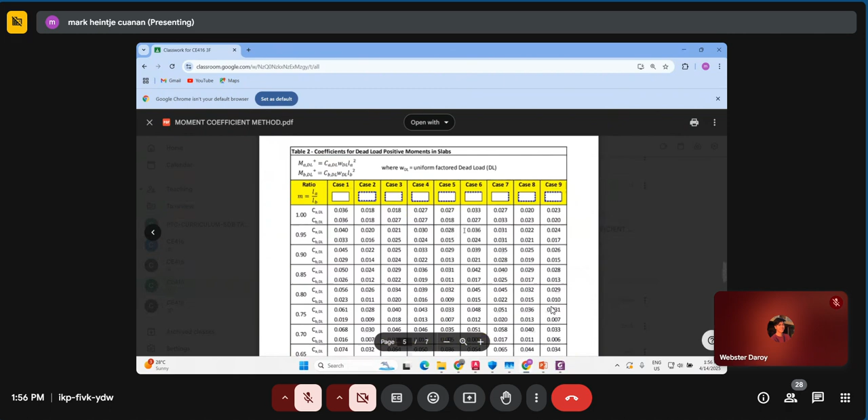Okay? So and then for our references, na dire ang ato ang lecture notes, and this file here is actually the file which explains the coefficient method and with the corresponding table. Itong table for our concrete slab design. Okay, yung mga coefficient, wherein ato na siyang i-discuss later on.

Okay, so as what we have discussed last time, for this week we are going to discuss the design of concrete slab because this will be included sa inyong final lab exam, or this will be included sa inyong compilation. Okay, so take note, you cannot design your frame, or for example, your beams, without designing first your slab.

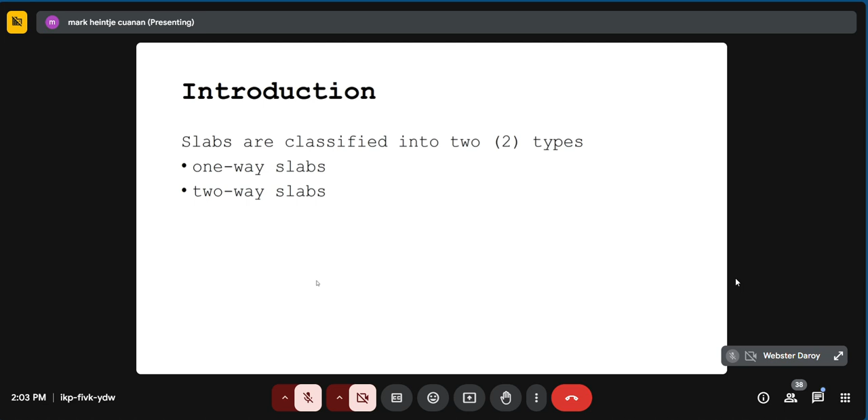Ganina ang definition ni Mr. Castro: pag ang atong longer side divided by the shorter side of the slab is greater than 2, then we can call it as one-way slab. So another approach in determining if the slab is one way or two way is based on the support. Kung ang support niya is only 2, duha lang kabuok, unsupported siya along the other sides of the slab, then we can also consider it as a one way slab.

Aside from that, if your slab is a composite slab, just like a steel deck slab, you can also consider this as a one-way slab. Because here, the load is not actually distributed by the concrete, but it will be distributed to the decking that we are going to install. And take note, the decking here is actually in one direction only. Isa ra ka direction sa atong decking.

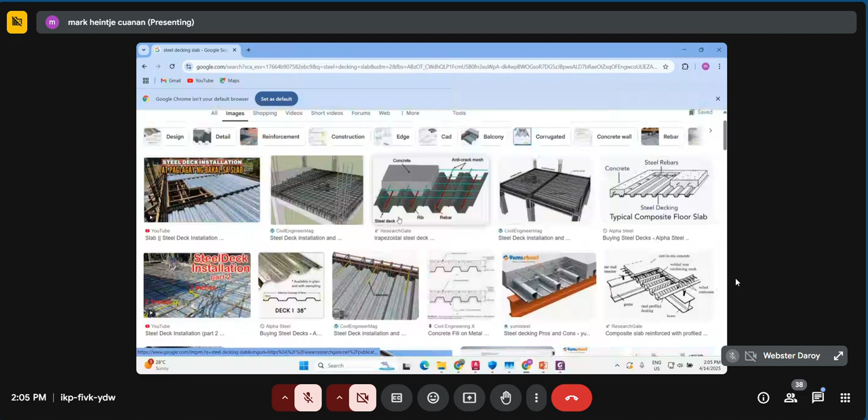So, meaning, kung asa siya nagpatong, or kung asa dapit ang iyang direction, didto i-transfer ang atong load. In other words, when the direction of the deck is only one, then the end-to-end of this span will transfer the load towards our beam. And in that case, that particular action is also a one-way slab.

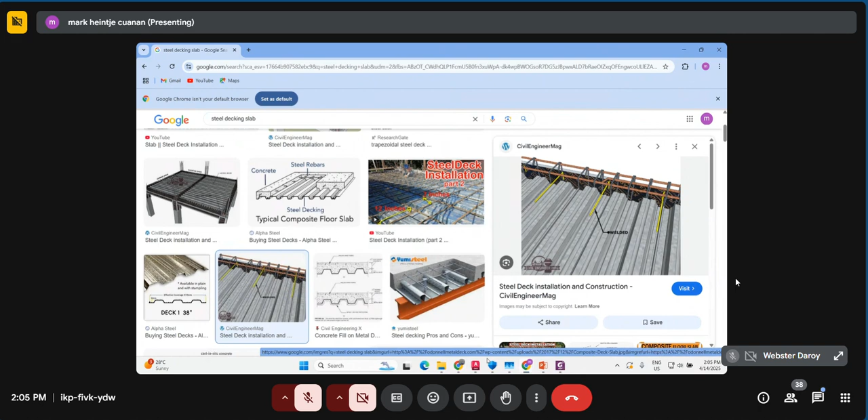Okay? So, the rationale here is that the second definition, the slab of which the ratio of the length to width is larger than or about 2, just like this figure here, dili lang kani ang definition sa one-way slab. We can also consider a slab as one-way when it is supported by two opposite sides only, just like this figure. And of course, if the slab is a composite slab, just like a steel decking slab, it is also a one-way slab.

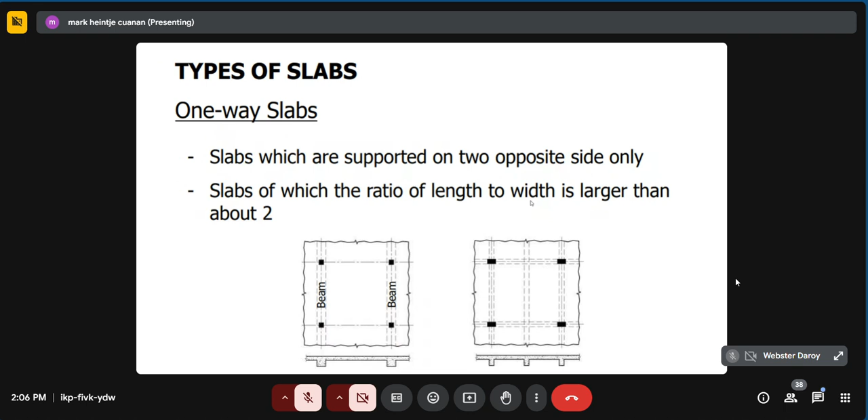So, for two-way slab, you will notice here, the definition is opposite to the second definition. If the longer side divided by the shorter side is greater than 2 for one-way slab, when the ratio between the larger and the smaller side of the slab is less than or equal to 2, then that becomes a two-way slab. And take note, naay different types of two-way slab.

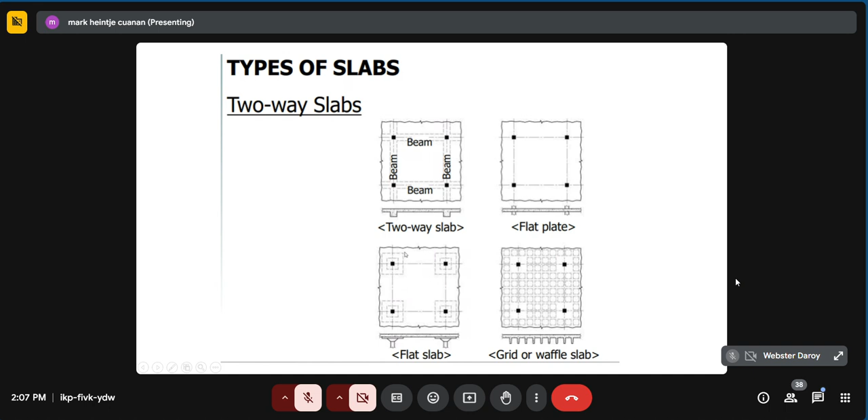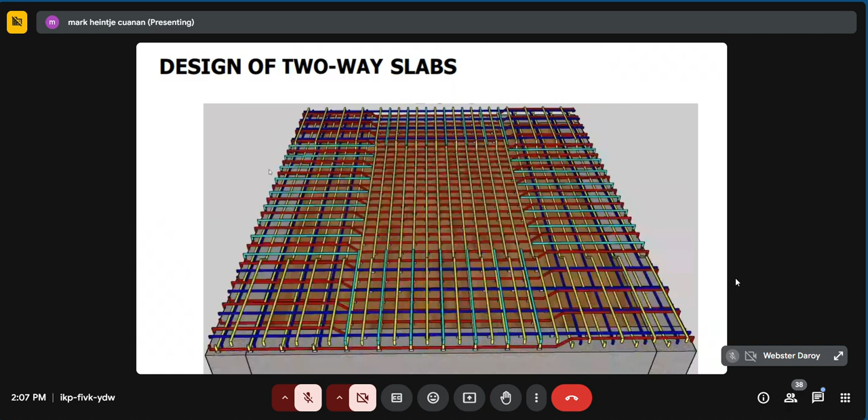Okay, for the one-way slab, take note, if the slab is one way, the bending action of the slab is also one way. So you will notice here that the slab bends along the short direction. Ito yung bending action niya. Unlike sa two-way slab, nga ang bending action is like this, in two directions. Both directions, the long and short direction, will bend. So that is the behavior of a two-way slab.

For one-way slab, the bending action is only in one direction. So meaning, for this type of slab, we only have one main reinforcement. And that main reinforcement will be installed along the short direction, just like this dash line here. This is our main reinforcement. Okay?

Okay, so in the design of one-way slab, take note of this, it is almost the same as that of a rectangular beam, a singly reinforced rectangular beam. So the design procedure for one-way slab is the same as designing a beam. When we design the slab, we take the thickness of the slab as the depth, and the width equal to a 1 meter strip on the slab. So we take a 1 meter strip just like this dash line here, assume that it is a beam, and therefore design it as a singly reinforced beam.

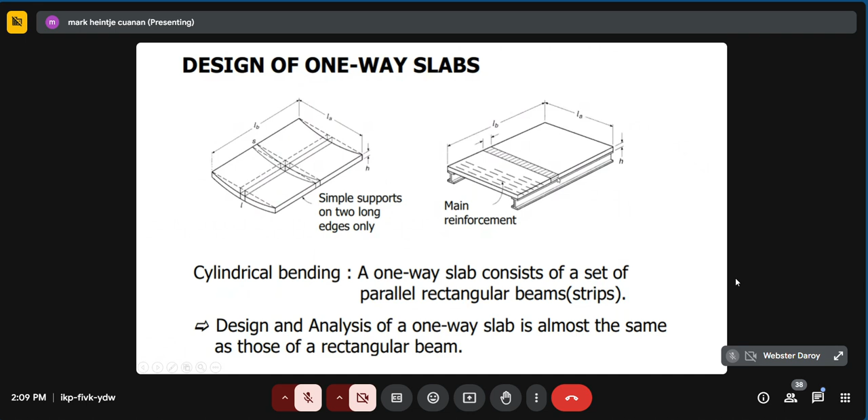Okay? And so, before the design process, we need to consider first the minimum required thickness of our slab. Take note, the thickness of the slab is dependent on the type of support employed. So for a simply supported slab, the thickness is simply equal to the span divided by 20, wherein the span we are talking about here is actually the short span. Itong span ito.

Now, kung simple supported slab siya, kung gipatong ra ang atong slab, it is not monolithically poured with our beam. Dili siya dungan nga gibuo sa beam. Gipatong ra siya. We cast first our beam before casting the slab. Then we can consider that as a simply supported slab.

Okay? Pero kung gidungan nato ang slab ug beam, then it becomes a fixed slab. So it could be a one end continuous slab or a both ends continuous slab. And each of these criteria will have a different required thickness. For cantilever slab, the minimum thickness is span over 10.

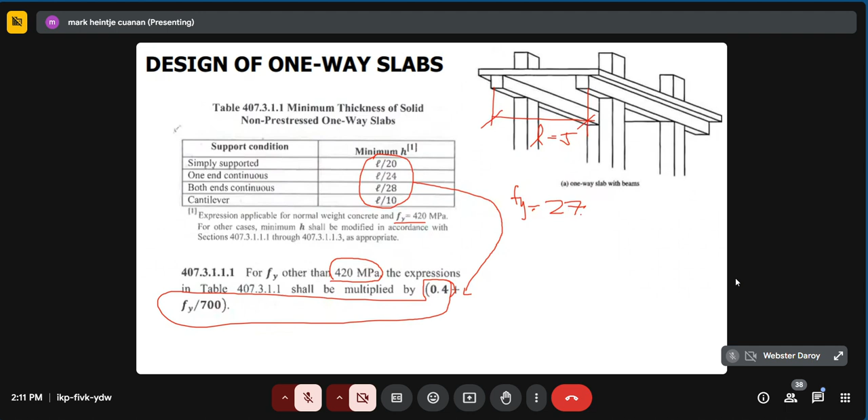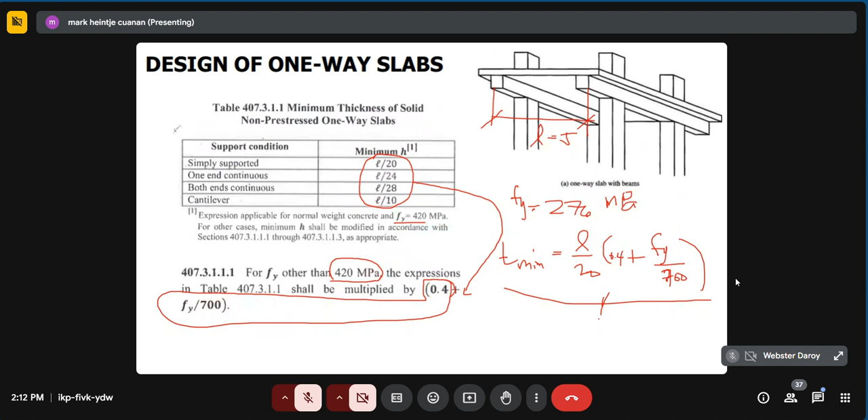So, for example, if the slab here is 5 meters and we use a yield strength of 276 megapascal, considering that this slab is simply supported, the required thickness will be L over 20, and since the yield strength is not 420 but 276, this value from the table shall be multiplied by the expression 0.4 plus Fy over 700. The resulting value will be the minimum thickness of the slab. Since it is the minimum required thickness, we can adjust it higher. Okay?

And then for our minimum steel area, the minimum steel area for the slab is simply equal to 0.002 times the gross sectional area of the slab if the yield strength na itong gigamit is less than 420. So take note, ang 0.002 shall be multiplied by our gross sectional area. So this is the steel ratio, 0.002. This one naman is the gross. In other words, this should be the base times the H, wherein yung base natin dito is 1,000. In other words, yung 1 meter strip nato ang gi-assume for the design of our slab.

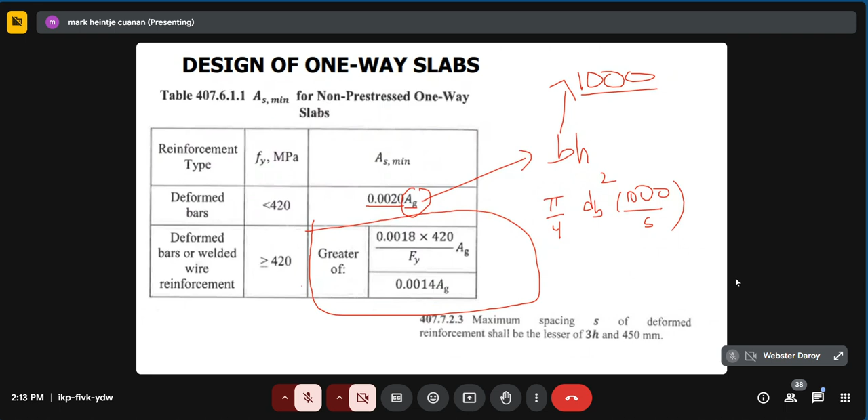Okay? And if the yield strength is greater than or equal to 420, then the greater of these two values here will govern as our minimum steel area. And from that minimum steel area, we can convert it in terms of the spacing. So, ang atong gamiton nga formula is simply pi over 4 times the diameter of our main reinforcement squared, times 1,000 over S, is equal to the required steel area. So here we can solve for the spacing. Dapat ang spacing sa atong main reinforcement shall not exceed 3H or 450.

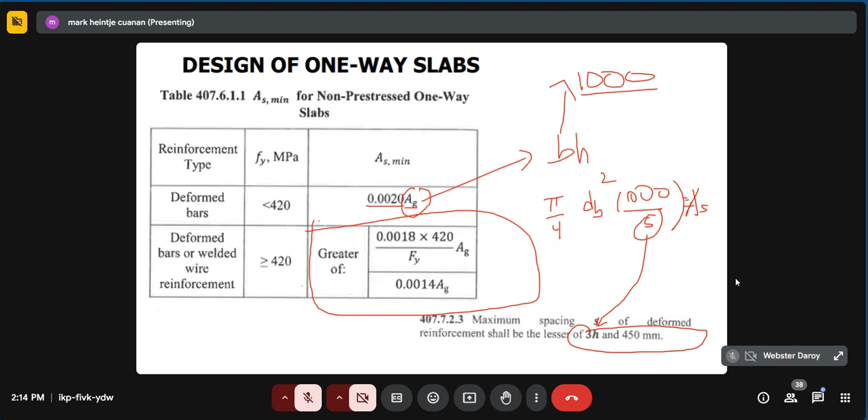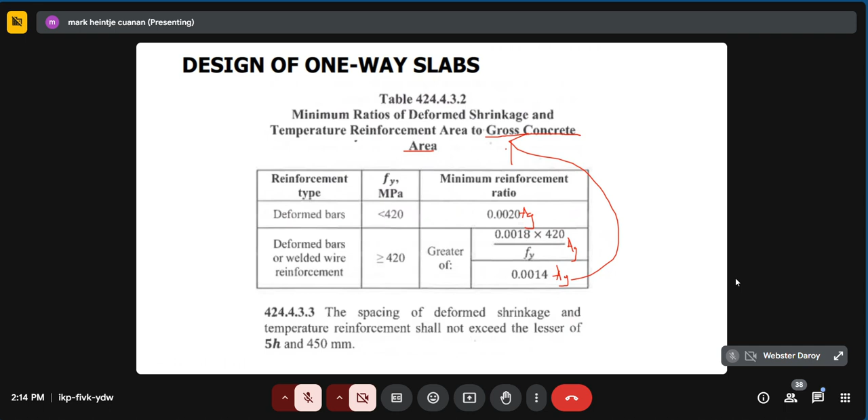Okay? And for the shrinkage and temperature reinforcement, aduna sa kitay minimum steel ratio. And take note, this minimum steel ratio presented in this table is actually multiplied by the gross concrete area. In other words, same ra na sila. Diba? Kung unsa ang minimum steel area for our main reinforcement, the same goes sa atuang shrinkage and temperature reinforcement, multiplied by the gross sectional area. Stipulated in the table, ang gamiton is simply the gross sectional area. Okay? So unsa man diay ang temperature bars?

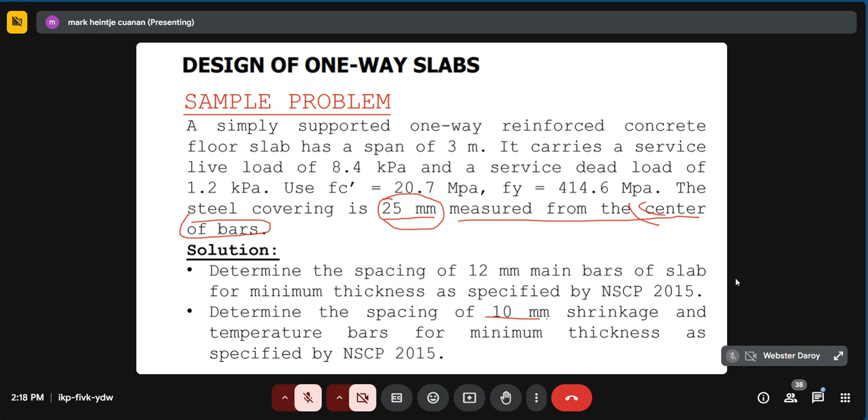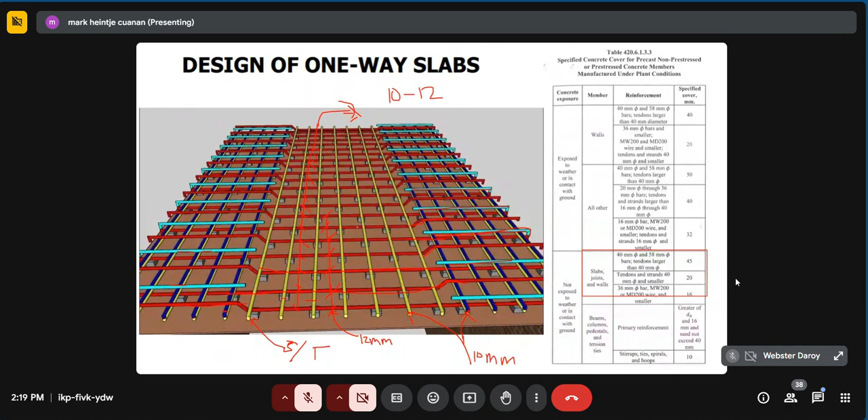Okay, so first requirement: we determine first the required thickness of the slab. It is a simply supported slab, therefore we are going to use the formula L over 20. And take note, the yield strength of reinforcement is not 420, so this equation shall be multiplied by the expression 0.4 plus Fy over 700. Substituting the value of our span, which is 3,000, coming from the 3 meters, we get a minimum required thickness of 148.823, which we round up to 150 mm.

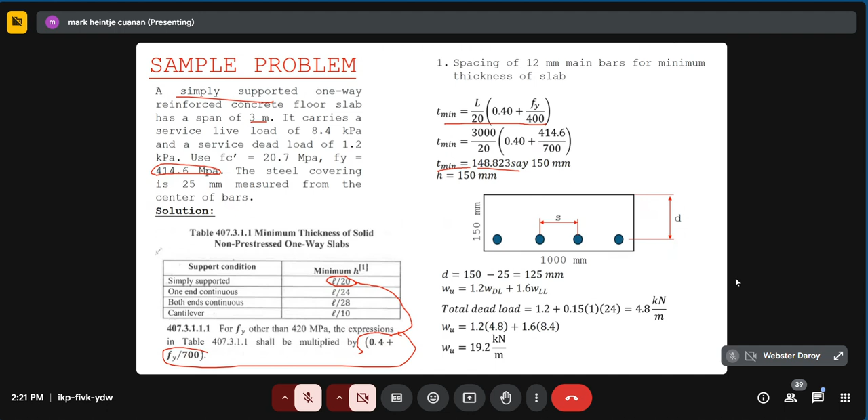Okay, take note: for dimensions, you're not allowed to round down. You need to round it up, divisible by 5 or divisible by 10, depending on you. And then the effective depth shall be 150 minus the overall steel covering, which is 25 mm, already measured to the center of our reinforcement. So that becomes 150 minus 25, and we will have an effective depth of 125.

And after that, we solve for the total load. Our total ultimate load will be 1.2 of the dead load plus 1.6 of live load, wherein the total dead load is the superimposed dead load of 1.2 kilopascal. Since this is kilopascal, we multiply it by the width of our slab using a 1 meter strip, so it becomes 1.2 kilonewton per meter, plus the weight of the slab, which is the thickness times the 1 meter strip width times the unit weight of concrete, 24 kilonewton per cubic meter, or you can use 23.544.

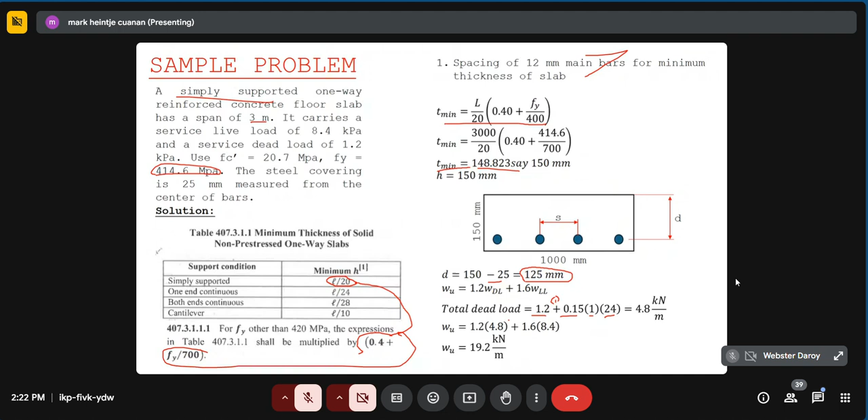So from that, we have a total dead load of 4.8 kilonewton per meter, and we use this value in our load combo to determine the total ultimate load of 19.2 kilonewton per meter. And since this is a simply supported slab, the ultimate moment the slab carries is simply equal to W L squared, the span squared, over 8. So our W, or our ultimate load, is 19.2.

A span of 3 meters squared over 8, we will have an ultimate moment of 21.6 kilonewton meter. No? So from this moment, pwede na rin mo na siya gamiton para ani. Ani over. Point reduction factor As Fy (d minus a over 2) to get for your As, or pwede ka nga to get for the As. Ya, kaning ato ang a diri, the depth of the compression block, you solve it using the relation of the compression force is simply equal to the tension force. So, parang beam approach. Or pwede ka mo gamit ani atong shortcut na formula.

The ultimate moment is simply the reduction factor f'c b d squared, reinforcement index, 1 minus 0.59 times the reinforcement index. Wherein the reduction factor here is always 0.9. It should be tension controlled as always. Okay? So that is 21.6. We converted it to newton millimeters. That is why it has times 10 to the power of 6. Simply equal to the reduction factor of 0.9, f'c 20.7. The width of our slab is 1 meter strip, that is 1,000, and our effective depth is 125.

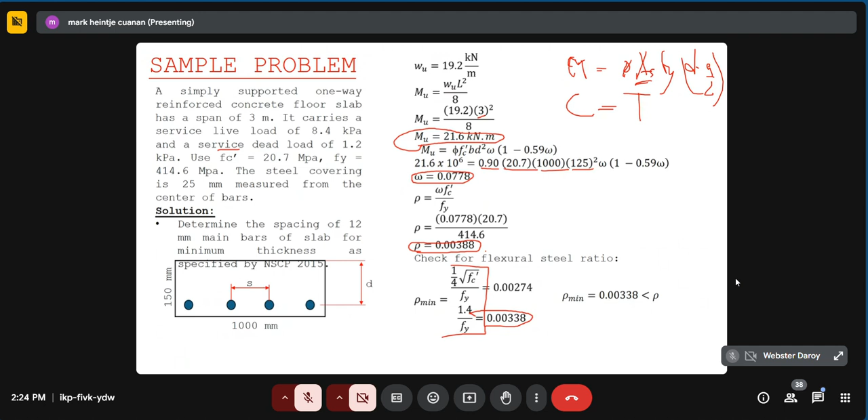So meaning the steel ratio that we are going to use is simply the 0.00388. Okay? And from this steel ratio, we solve for the required steel area using steel ratio, the base times the effective depth. So we have a required steel area of 485 millimeters square. Take note, ito yung required steel area. We need to check it again based on the minimum steel area. Wherein our yield strength is 414.6, that is less than 420 megapascal. Therefore, the minimum steel area is simply 0.002 base times height or yung gross sectional area natin.

So from that, we have 0.002. Our width is 1,000 or 1 meter strip. The overall thickness of our slab is 150. We will have a minimum steel area of 300 millimeters square, which is less than the required steel area of 485 millimeters square. So meaning, ang mag-govern anak niya karon is katong ato ang required nga 485 millimeters square. So take note, if the minimum steel area is greater than the required steel area, then ang mag-govern anak niya is the minimum steel area. Mao kana ang gamita as your steel area.

And from that steel area, we use the diameter 12 mm as our main bars and substitute it to our formula so that we can convert the steel area into its equivalent spacing of our main reinforcement. So from that, we have a spacing of 233 millimeters, say 230. So take note, when you talk about spacing, it should be round down. It should not be round up. It should always be round down. So meaning 233 millimeters, you say 230. Now, take note, dili pa na siya mao ang answer.

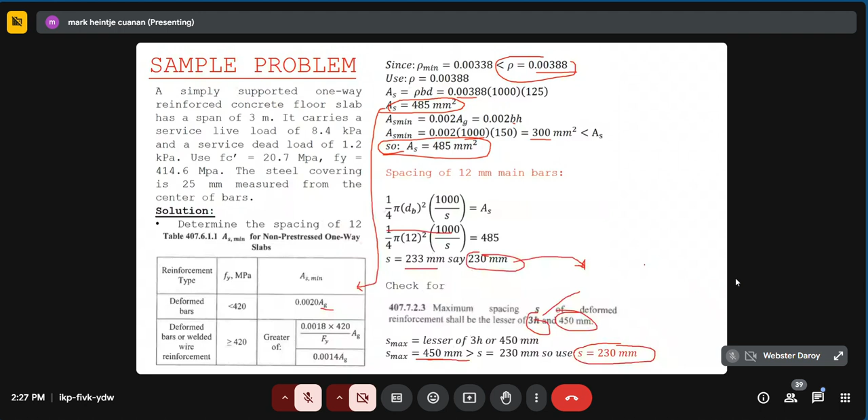Alright, so any question, clarification so far? Do you have question with regards to problem 1, question number 1? Gets ka ba? What about the others? Kindly, lihog ko verify or acknowledge, no?